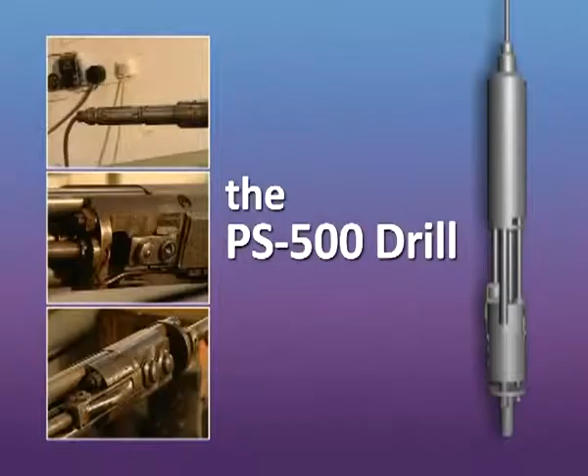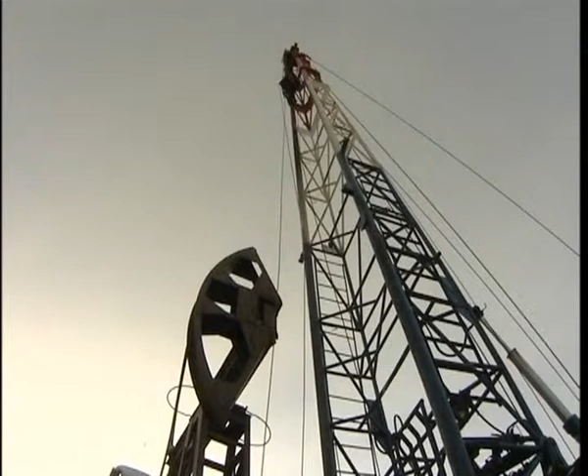Secondary formation exposing is one of the most important tasks solved during well completion. The primary function of any perforation is to ensure dependable hydrodynamic connection in the well reservoir system.

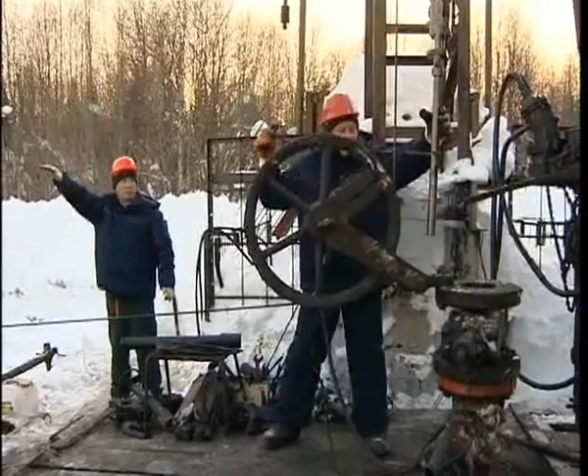At present, there are three main techniques of secondary exposing of producing formations in cased wells: shooting, hydraulic jet perforating, and mechanical method, which includes drilling. Most common are shooting and hydraulic jet perforation.

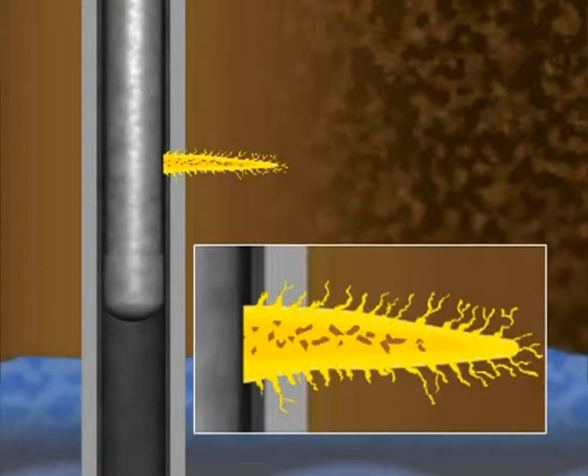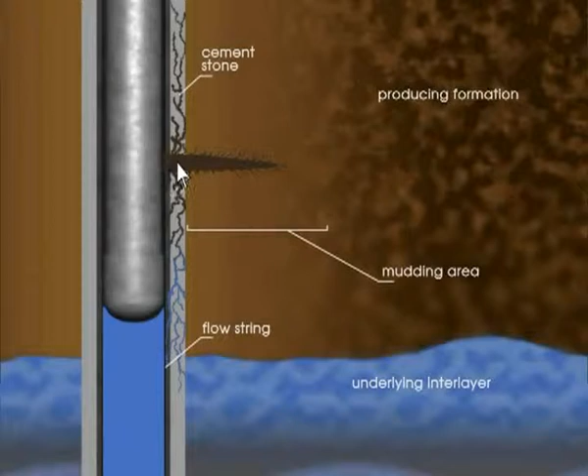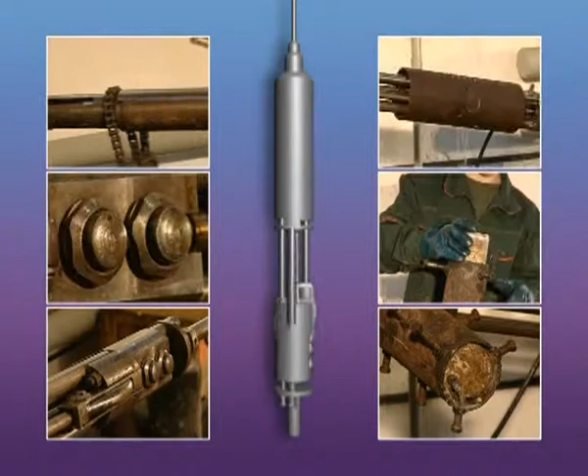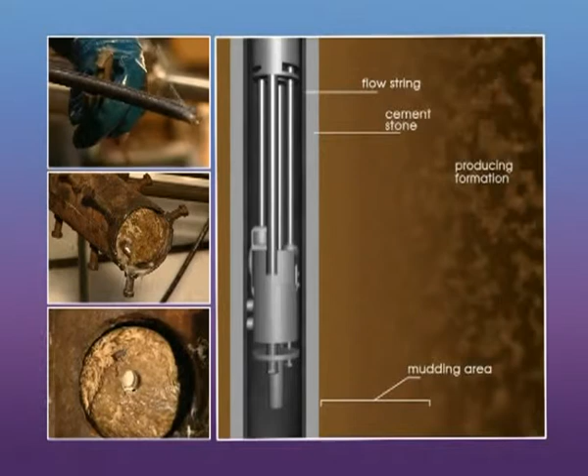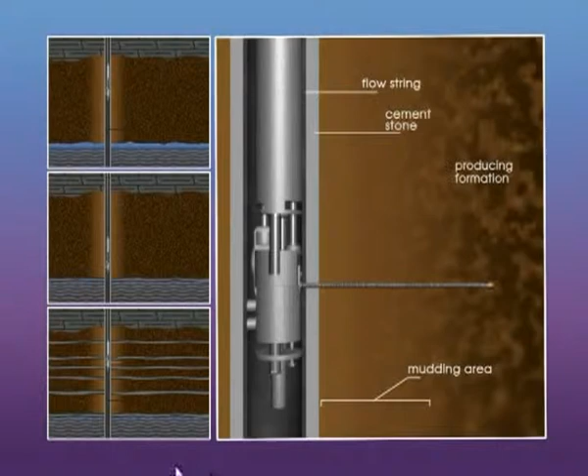The stated disadvantages determined the activity in search for non-impact techniques of perforation and devices suitable for such purposes. Drilling is classified as a sparing technique. Unlike shooting and hydraulic jet perforation, it affects neither the support integrity nor the lithological properties of the producing reservoir rocks. Drilling with deep penetration of perforations is efficient in wells of any destination operating producing formations of various type and lithology.

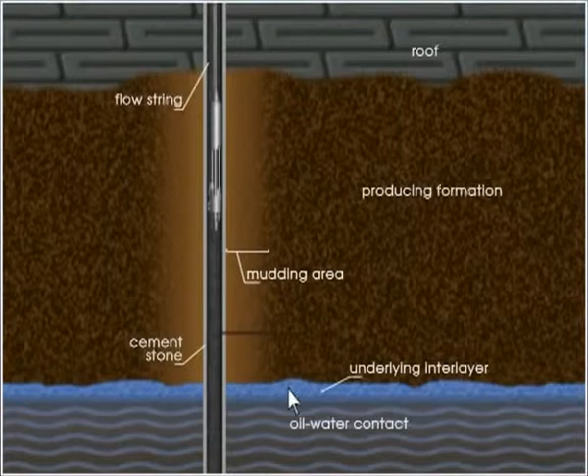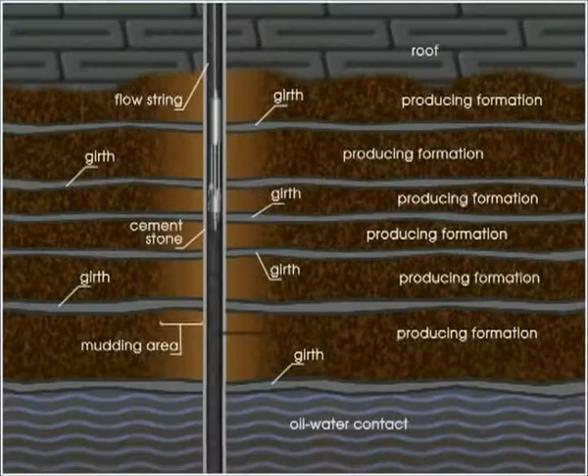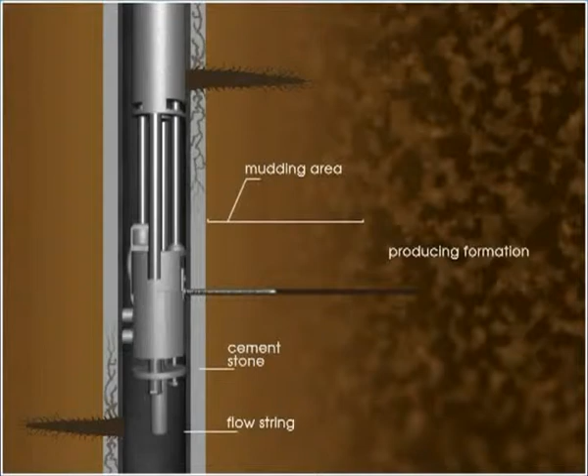However, unlike other types of perforation, the greatest effect occurs when exposing producing formations with bottom water objects, where the oil-saturated portion of the reservoir is separated from the water-saturated portion by a thin, unstable girth, or when exposing permeable interlayers of thin layer formations selectively. A good effect is expected if drilling is used as an intensification method during additional perforation of heavily mudded reservoirs which have been operated for a long time.

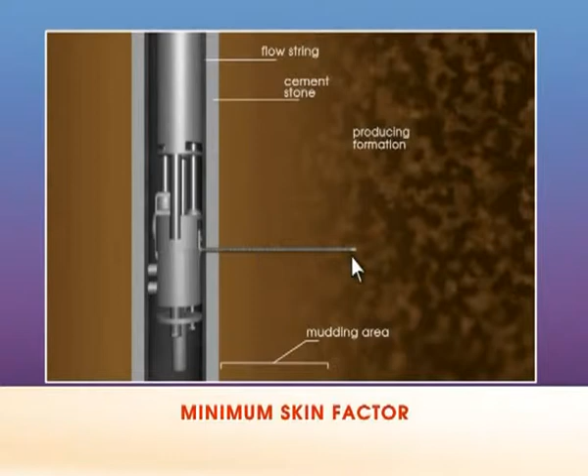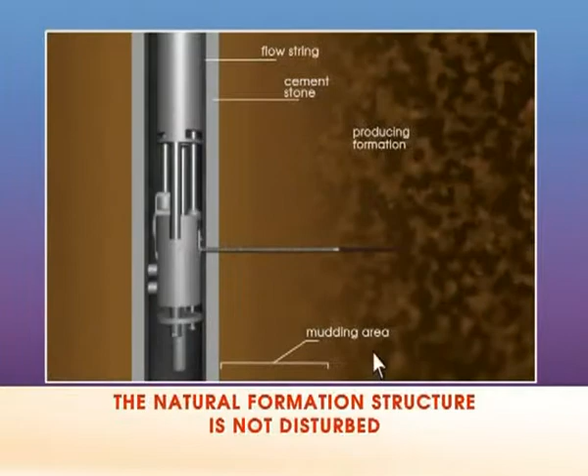Efficient hydrodynamic connection in the well reservoir system. Minimum skin factor. Selective spot perforation of complex structured formations. The well bore support remains unbroken. Thin argillaceous girths remain unbroken. The natural formation structure is not disturbed.

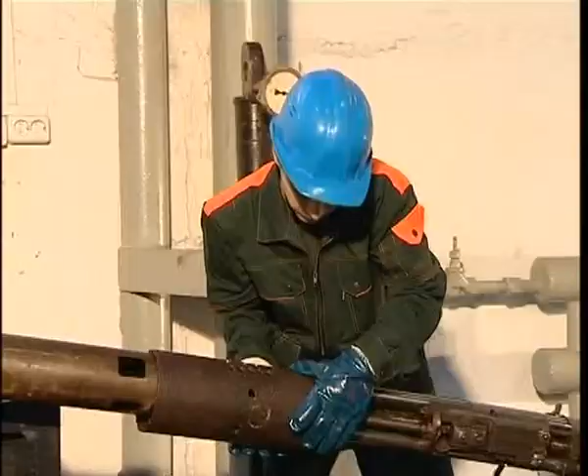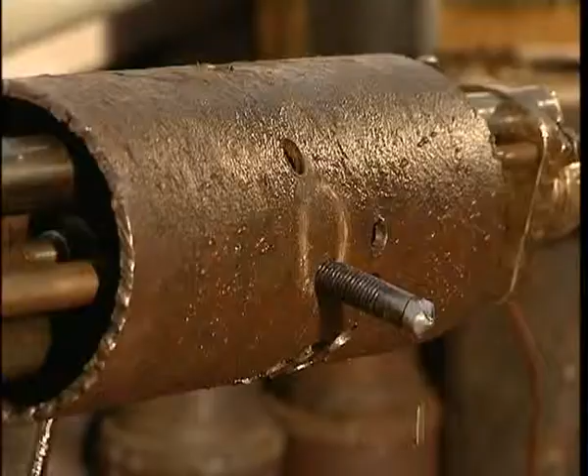In order to solve these tasks, ERGIS scientific production enterprise has developed and put into production the cable tug drill, which allows production of deep penetration perforations through which the well bore intercommunicates with the unbroken formation area, which has natural filtration characteristics, without breaking the well bore support and impairing natural drainage properties of the producing reservoir.

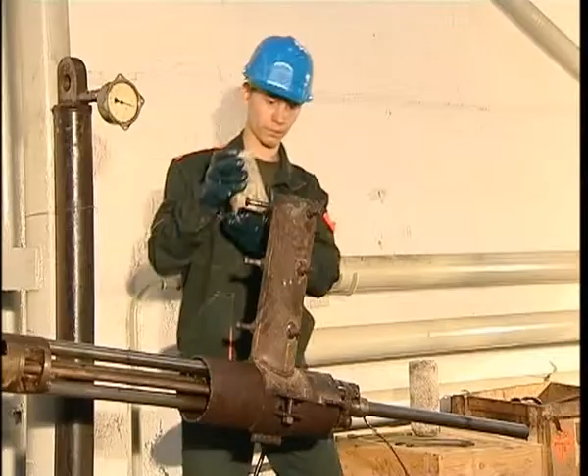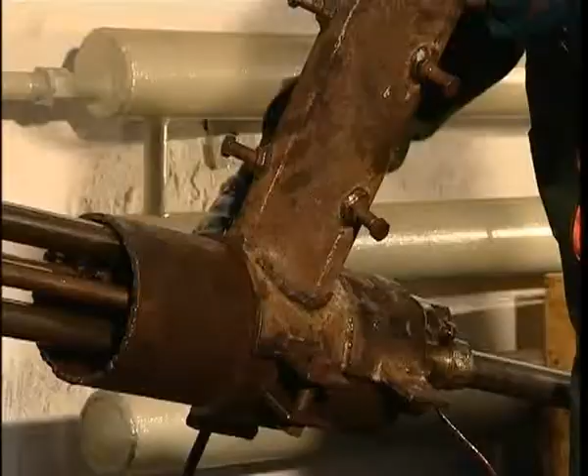The deep penetration drilling technique allows minimizing the skin factor, spot perforating thin layered formations and formations located near water bearing ones selectively. Advantages of the deep penetration drilling technique allow achieving optimal operation of productive reservoirs.

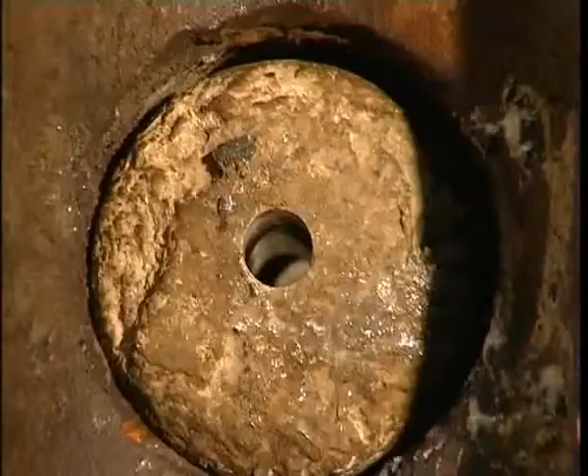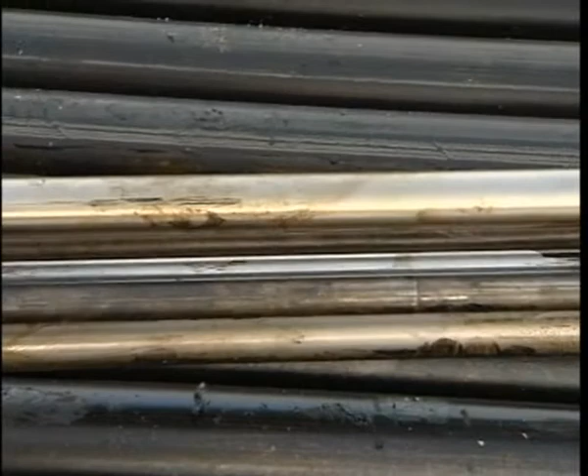The perforator comprises a number of electromechanical and hydraulic systems and assemblies which ensure fixation of the perforator in the well, drilling of deep perforations in the well bore wall and the productive reservoir, and subsequent return of the perforator mechanisms to the run-in initial position.

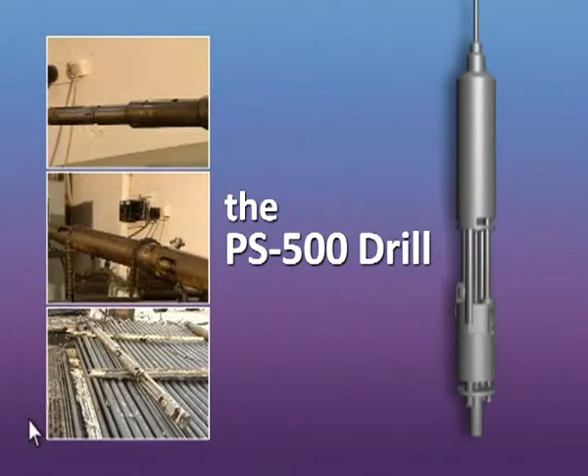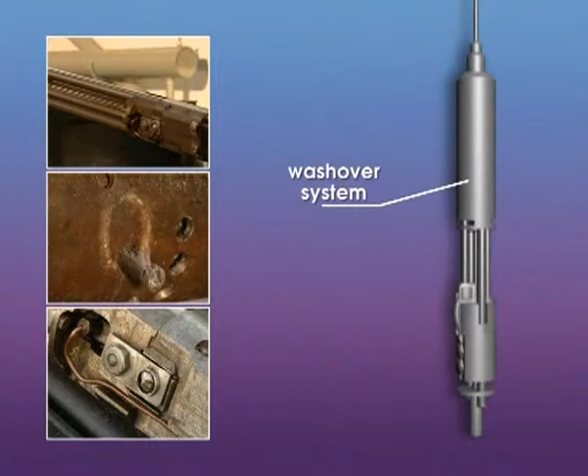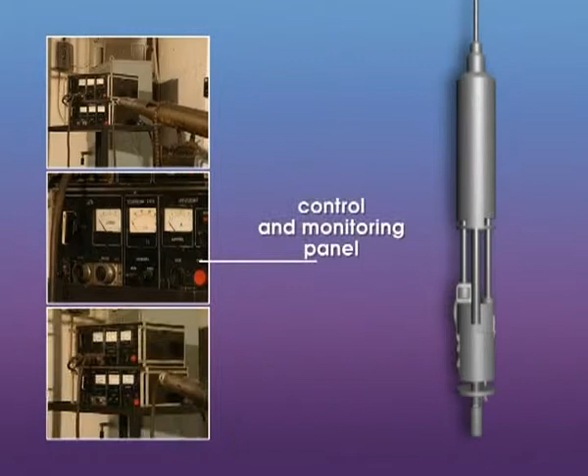The perforator comprises the drive module, which imparts axial advance to the flexible shaft bearing the cutting tool; the clamping module, which fixes the perforator in the well; the flexible standoff assembly, which changes the flexible shaft from axial direction to radial direction; the flexible shaft bearing the cutting tools on its ends; the washover system, used for washing chips and sludge out of the perforation during drilling; the mechanism used for resetting the flexible shaft with the cutting tool. The control panel is used for controlling the device from the well surface and monitoring the drilling process.

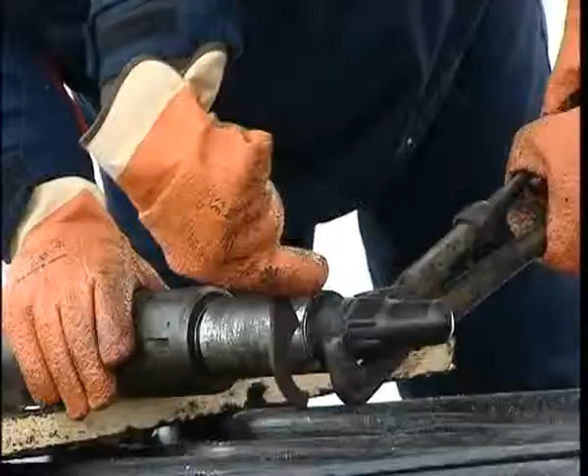Drilling shall be performed by a standard geophysical crew equipped with a well logging truck hoist with a 3-core cable of up to 5,000 meters.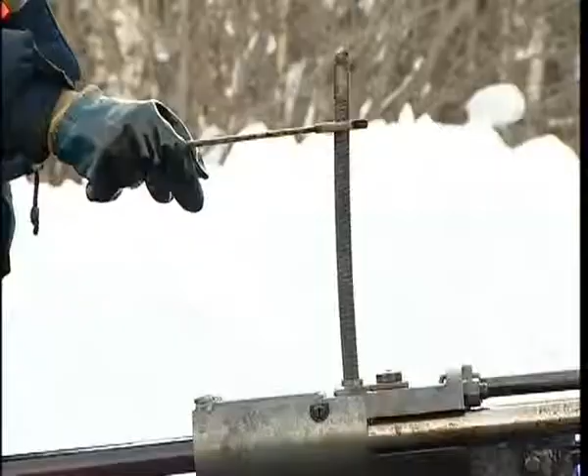Before lowering the device into the well, its functionality shall be checked on the test bench. Then the device is lowered into the intended perforation zone using the logging cable.

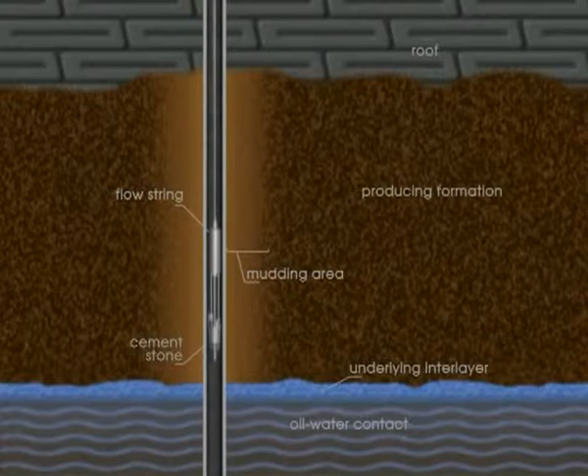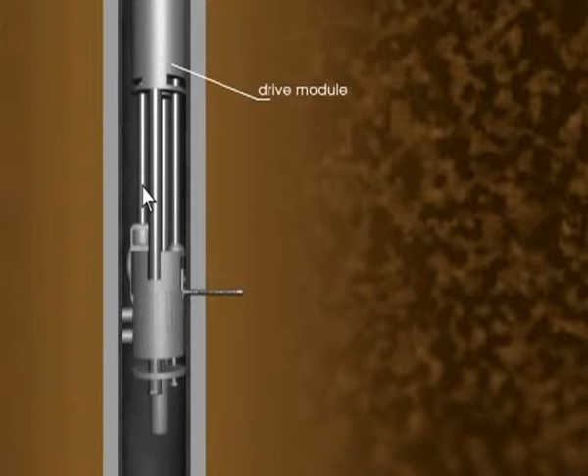The clamping module fixes the device in the well bore, and the drive module produces axial thrust and transmits the rotation force to the flexible shaft with a cutting tool on its end. The flexible shaft assembly changes axial motion of the flexible shaft to radial motion.

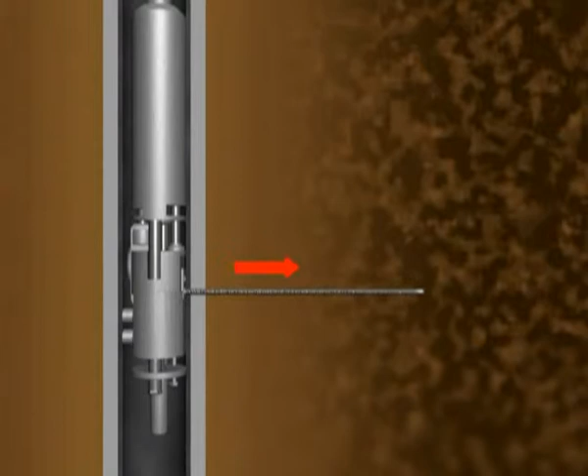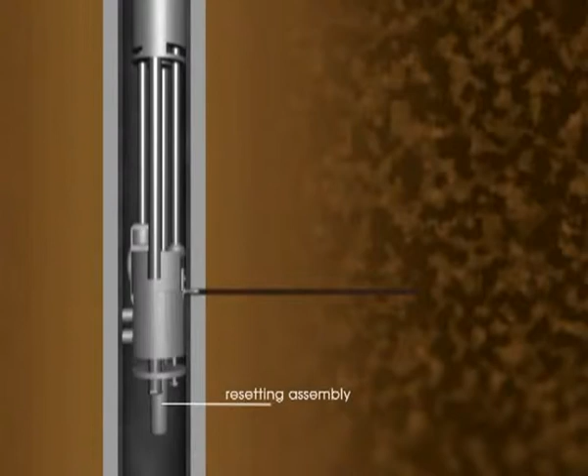Coming out of the device case, the cutting tool drills the well bore walls, the cement stone and the rock, producing a perforation. Then the resetting assembly resets the cutting tool. The clamping assembly returns to its run-in position. The device moves over to the next drilling point.

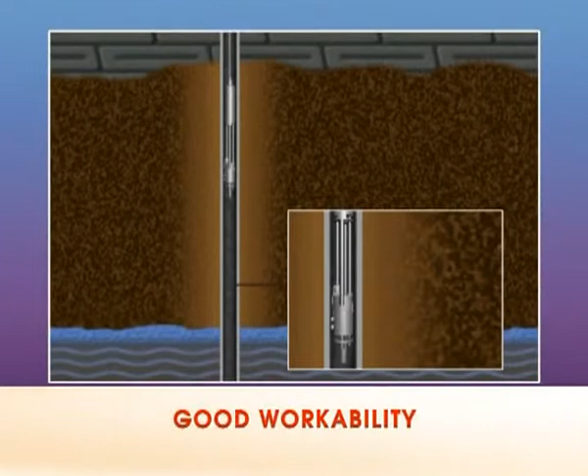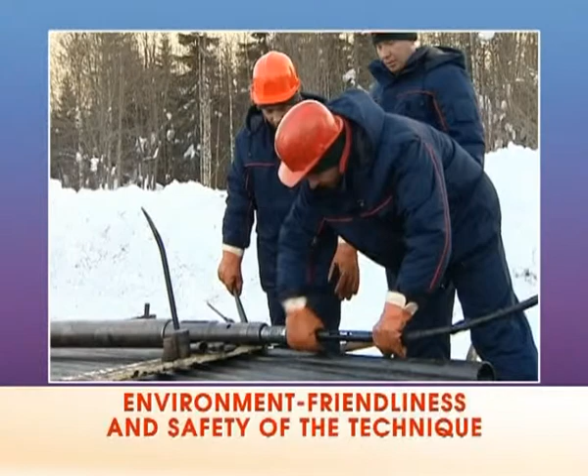Good workability. Process fail safety. Expensive high-power pumping equipment is not required. Environment friendliness and safety of the technique. Maximum waterless operating conditions. Efficient stimulation technique.

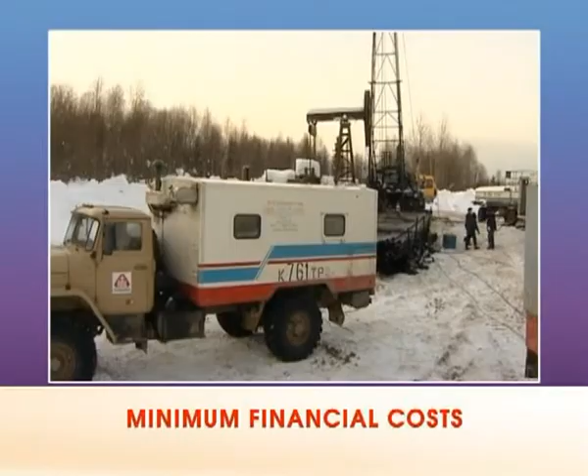Minimum financial costs. New generation deep penetration drill opens up promising capacities for secondary exposing of complex structured productive reservoirs of various lithology.

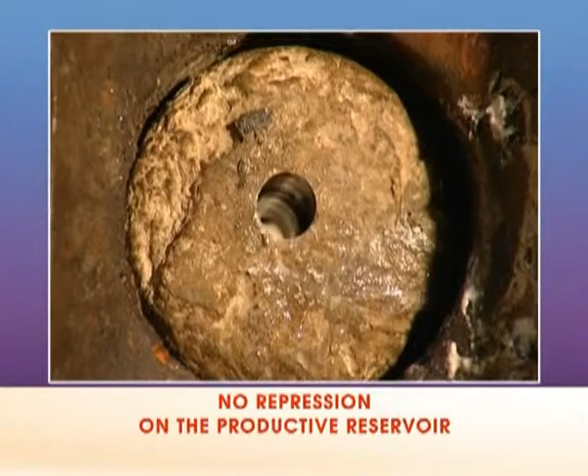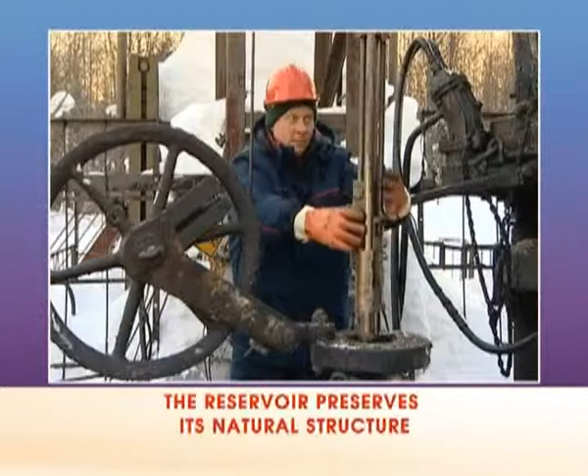No repression on the productive reservoir. No temperature impact. No breaking loads. The flow strings and the cement stone remain unbroken. The reservoir preserves its natural structure. The perforation wall drainage area is increased. Minimum skin factor. Optimum operating conditions of productive reservoirs.